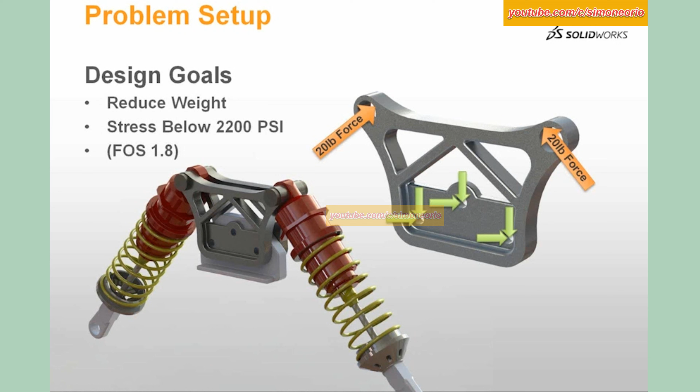What we're going to start off with is design 1, which is essentially that plate of aluminum that was just laser burned out. Design 2 has a relief cut to try to reduce weight. Design 3 has a couple of ribs put back in, and you'll see why in a second. As I went through design 1 to design 2 to design 3, I saw that the stresses were a little bit higher than I wanted, so I added those ribs to try to alleviate that, but it didn't really make a difference, and we're going to discuss why.

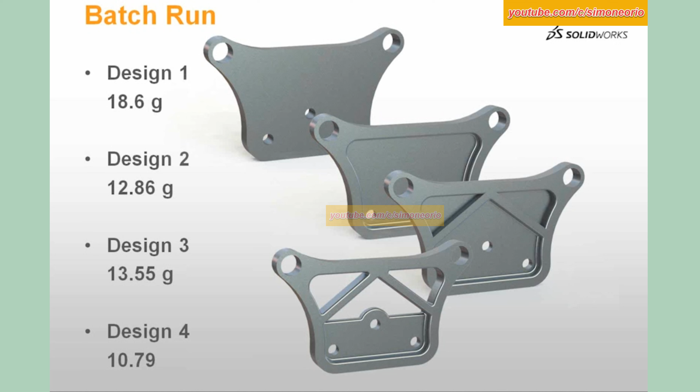We're ultimately going to end up at design 4, which gives us 10.79 grams, down from our starting weight of 18.6 grams. As you can see here, just as a spoiler, our stress is still at 2,843, so we're not meeting that original goal, but we did reduce the weight by about 41%. So we're going to discuss where we're at with design 4 and what our next step is.

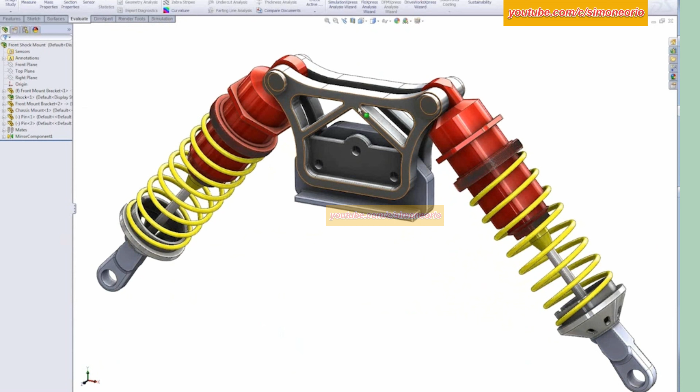Let's go ahead and go into SOLIDWORKS here, and we can see that this is our assembly model. Now what I'm going to do is isolate the work on the bracket itself, so let's open up this part. One of the things I've utilized inside SOLIDWORKS is configurations. The nice thing about configurations is they're linked to our design studies inside simulation, so essentially we can do a simulation study per configuration. If we look, this is where I started, then went to design 2, design 3, and design 4. We see the changes from that recess to having the set of ribs and then the full cuts through here.

Let's just talk about design 1 and what we want to do as far as an analysis. We can start simulation right from the simulation tab, and I'm going to start a new study, and we'll call this one test, for example. The material did come over from inside SOLIDWORKS - I have a 1060 alloy aluminum assigned to this.

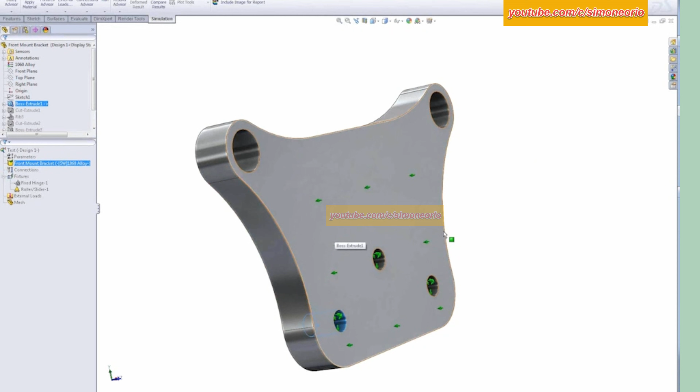For our fixtures, we have to represent the real-life fixturing of this component. These 3 holes are actually bolted into the chassis via that other component, so I'm going to fix these with a fixed hinge. The other thing I'm going to do is use what is called a roller slider on the back side of the component. Typically I would use a split line to show where the bracket actually connects in here, but for a first pass we can just assume that this whole back side cannot move in and out.

It can only slide along that plane. Our forces we can add directly into these holes essentially via the pins or the strut, and we're going to be dealing with English units, and this is 20 pounds.

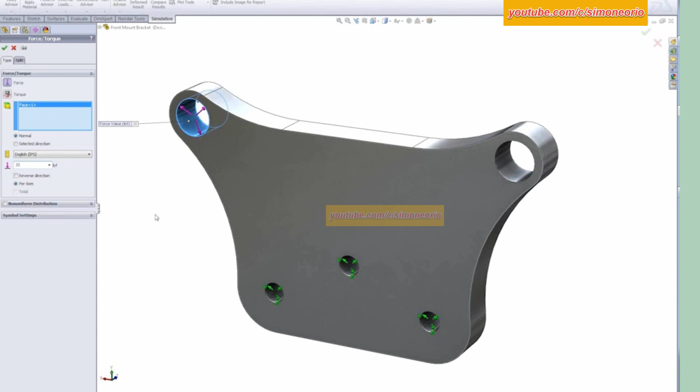Now what you're going to notice here is that the forces are always normal to the faces, but what we can do is we can specify in a selected direction. One of the neat things inside of simulation is if I have a sketch, which is what I use to mount my struts in the assembly, I can say that the force goes along that direction, and we want this to be 20 pounds.

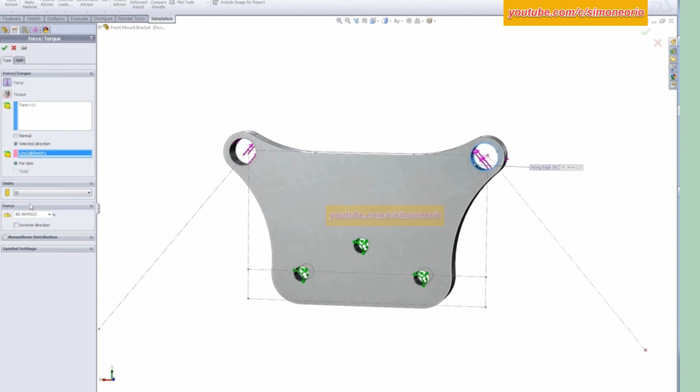So I'm going to add an additional force here, same force on the opposite side. Select a direction. I'm going to select my other sketch line to give me my proper vector, and we want this to be 20 pounds.

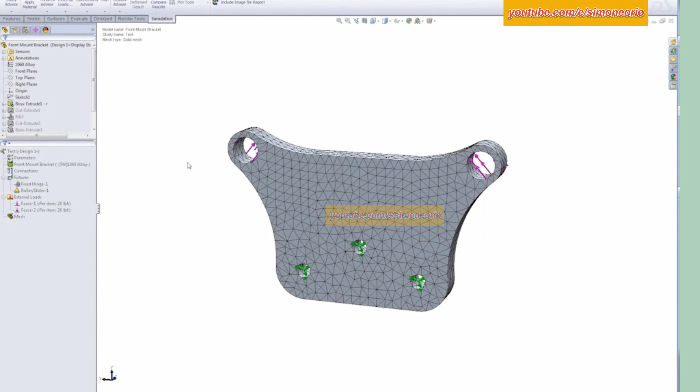So it looks like we're set up. The next step is we're going to discretize this model. So let's hide this sketch here. We're going to break this down into a series of elements in order to solve our mathematical equations across it. And then let's go ahead and run this analysis and see what we get or receive from the results.

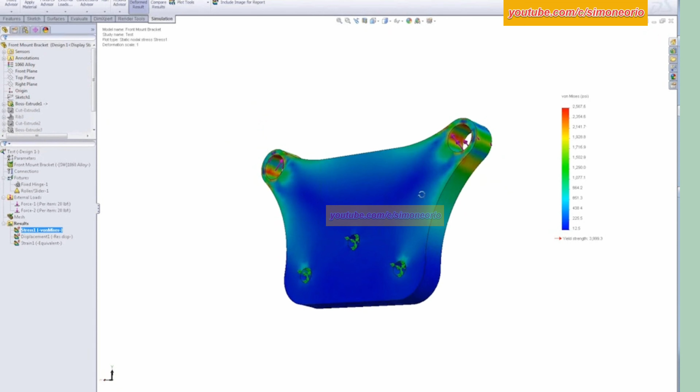So the first thing that I want to do is look at my stress results in PSI, and I also want to look at these as far as a true scale. So what we're seeing here is 2,567, so we're not at the 2200 PSI. I'm going to hide my fixtures and my loads here so we can better see this.

We can also view displacement as well, and again we can go through and look at this in inches and on a true scale. So we can see our displacement then, if we adjust this to floating, and let's increase this out, is about 0.00024 inches. So very little displacement there. We're really seeing the stress being absorbed in these areas.

Now a couple things that we can look at with this is we can evaluate the component as far as we can look at sections of it. The nice thing about this is typically with physical testing you have a strain gauge located on the part, and if you didn't put the strain gauge in the right location, you may not receive the proper stress calculations or back calculate the stress out properly.

One of the nice things with simulation is I look at the section clipping as an MRI into the part. Not only do you receive the surface data that you would gain from your strain gauges, but we can actually see inside of the part through the thickness what our stresses are and how they propagate out into the part.

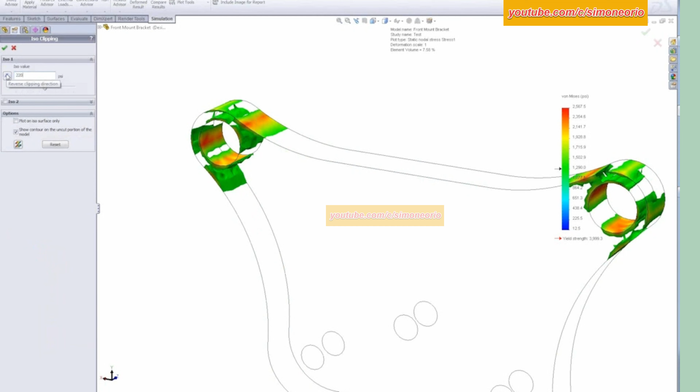Another thing that I like to look at here is our ISO clipping, and I can basically go in here and say what is everything that is 2200 and above. So we're seeing these higher areas in these locations. That's everything above our criteria.

We can also do the reverse of that if we need to, or we can say, you know what, I want to look at this at 1800 and see what that looks like. So the ISO clipping gives us a good view of what we're seeing as well.

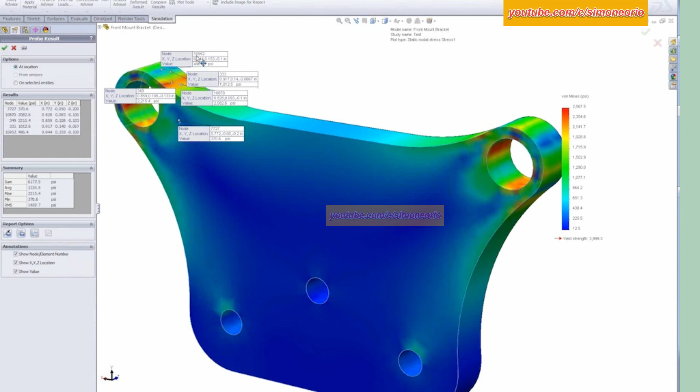We can also use what is called the probe tool, so we can go in here and probe at different areas and see what our stress is at our node location. We can plot that out so we can gain data there. We can also save that out to Excel if we need to.

Or if I want to know the average, let's say on this face, we can select that entire face and get all of our values. We have a summation, an average, a max, a min, and an RMS for everything on that face. We could also do the body as well, or an edge or a vertex.

So what we see here is we're a little bit over our criteria stress-wise, and we're heavy. So the next step might be to try to take out weight and see where we fall stress-wise. So what we can do is I can actually duplicate this analysis, and we can call this test 2.

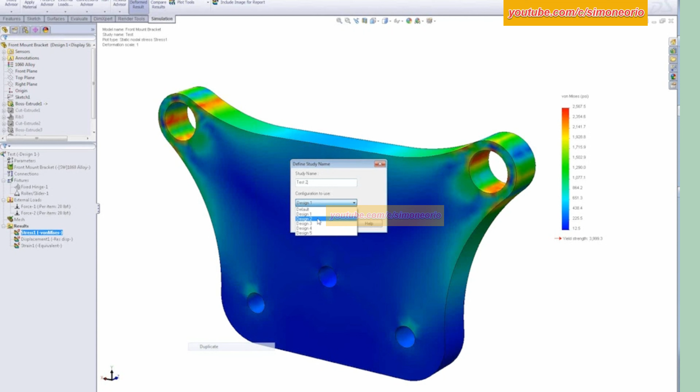And we can pick from our configurations design 2. What you're going to see is when you duplicate a study, and what makes this very nice, if I activate this configuration, our forces carried over, our fixtures carried over. All we have to do is simply mesh and rerun.

So what you're going to see here is essentially that I did that for Design 1, Design 2, Design 3, and Design 4. Now, how we're viewing this is essentially that we made these design changes without looking at our results. We made all these different versions, and now we're saying, how do they analyze or how do they come out? Well, instead of running these one at a time, I'm going to use what we call a batch run, or run all studies. What we're able to do here is go in and say, run all of these studies and tell us what are the results for each one of those.

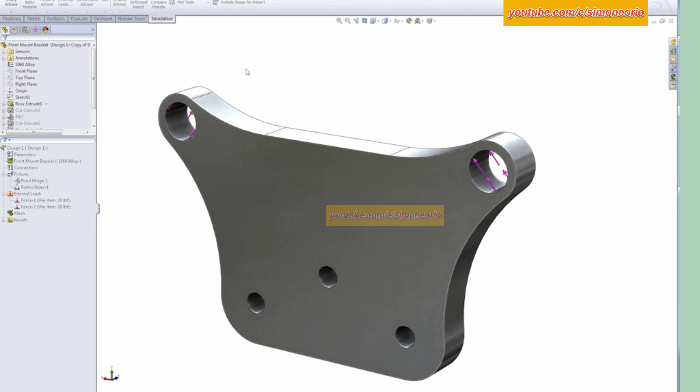So what we're seeing is it's actually meshing a part for each one of those configurations, and then it's going to go through and run the analysis for us. And what we see is we have our results.

So for Design 2, if we switch to it, we have to activate that configuration. But what we should see here then is our stress is still around 2,534, but we do have that reduced weight.

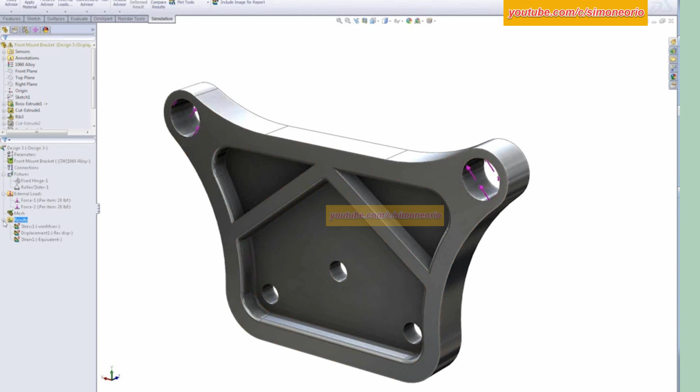If we switch to Design 3, what we want to look at here is this has the ribs in. We increased the weight here, if you recall, but having those ribs really made no change in the stress. So the stress is really being seen in these areas.

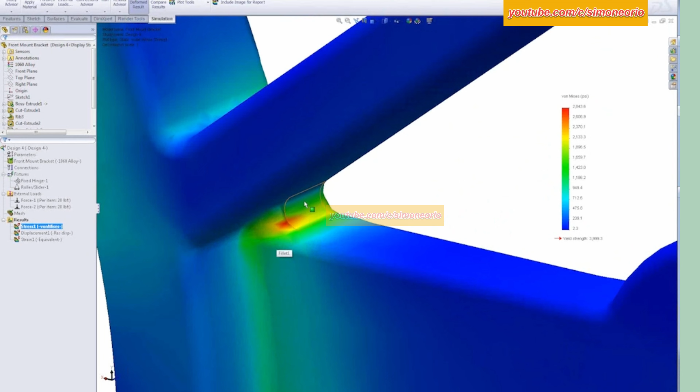And then Design 4, if we activate this configuration, what we're going to see is that our stress actually went up, and the reason being is we actually have this area with too small of a fillet, so that we're seeing essentially a stress concentration here as well.

And the reason that we can tell that is obviously because of the visibility there. And if we go into our legend, we can say show max annotation, and what we're seeing is it's calling it out in this area. So that's our maximum stress. So it's a good indicator of where the maximum stress is, or where that stress was added in if you didn't happen to see that.

So another thing that I want to look at is clearly this design is less weight, but our stress is actually higher than when we started. So, what can we do to alleviate this?

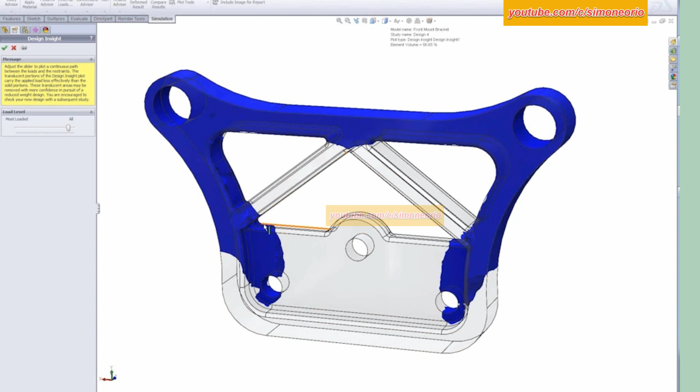Well, one of the things that I want to look at is a different type of plot, and that plot is a design insight plot. And what this allows us to see is essentially how the force is transferred from the location that is applied to the fixtures. And what we can see is it's actually through this main body and down through the bottom and into that filleted area.

So with that being said, I have one more design change that I want to take into consideration here. So I'm going to duplicate my study again, and we're going to switch to Design 5.

So with Design 5, I made a couple different changes here. Let me activate this configuration. So with the design insight plot, I saw that the bulk of the load was being applied to this upper area, so I added more mass there. I also saw that we had a stress concentration in that very small filleted area, so this allowed me to make that design change and add a larger radius in that area.

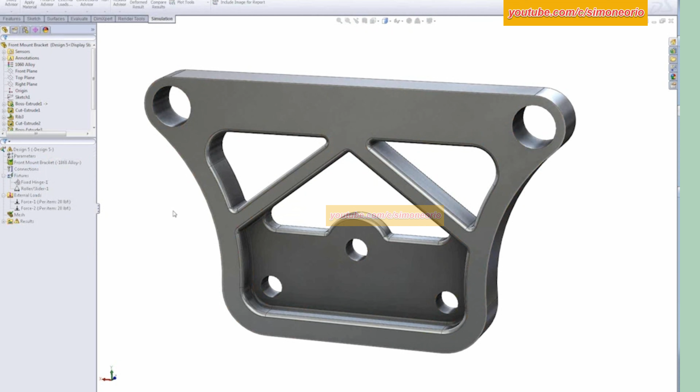So let's go ahead and run this analysis and see what we end up with. And what we're seeing here is we're now right around 2,000 psi, so we're 200 below where we wanted to be. So we're meeting those goals, and if we switch back to our PowerPoint here, what we're going to see is with Design 5, the weight is actually 13.9 grams.

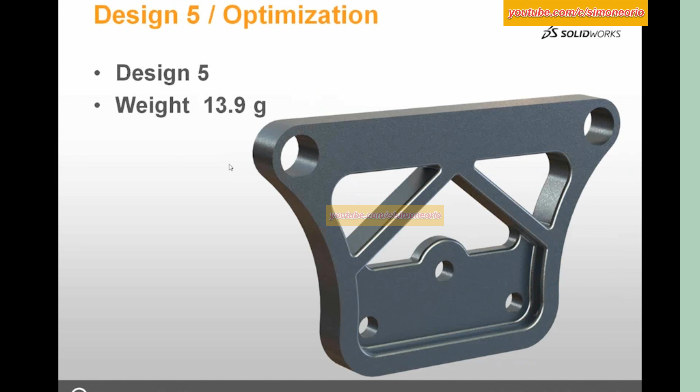So we're meeting our goals, but what can we do to really take the rest of the weight out of this? The next step is really to optimize this part. So what we can do is we can look at this and say, you know, we can vary the actual overall thickness of the bracket across here, and we can vary the size of the ribs, maybe make those larger or smaller to take out some weight.

So we could carry on through the rest of our design process, manually make those changes, add a new configuration, add a new study, run it again, or do a series of batch runs, or we can utilize what is called a design study with optimization.

So under Insert, we have a design study. Now, before we even get into that, I want to talk a little bit about sensors. Sensors are something inside of SOLIDWORKS that gives us feedback about our model. They do not have to be simulation related.

If I right-click on my sensors folder here, I can add a new sensor. So it can be mass properties, it can sense a dimension, a measurement, or simulation data. We're going to add a sensor here, but we're going to add a sensor for displacement and resultant displacement for the entire model. The other sensors that I added were stress and mass.

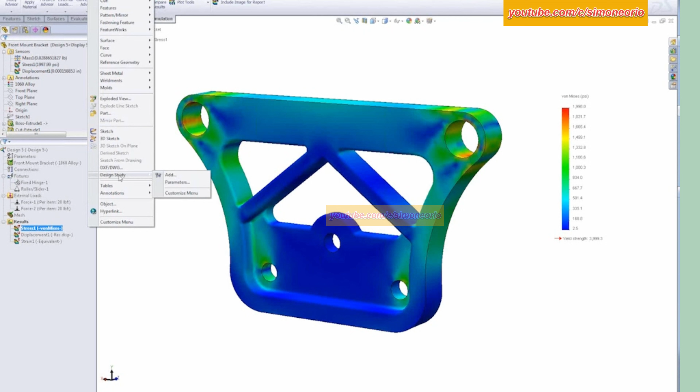We want to minimize the mass and we want to keep the stress below 2,200. Now these sensors are what give us feedback in our design study. So let's go ahead and start a new design study. First thing we have to do is tell the software what we're going to vary with this.

So I can actually pick up on my model dimensions. My thickness is going to be 0.2, and I already have that parameter added. It's as simple as going here, saying add parameter, and choosing that dimension. I'm going to specify a range for this. My minimum thickness is going to be 0.15, and the reason for this is my overall size is 0.2 thickness, so my maximum is going to be 0.2.

But my cut in is 0.125, so I want to still have some meat on this part in that area. My other parameter was the rib, so I want to do a range with the rib, and my initial thickness for the rib is 0.1. I'm going to stick with a maximum of 0.1, and my minimum is going to be 0.05.

Now the next thing we have to tell the software is what is our constraint? What do we have to stay under? So I'm going to tell it my stress needs to be less than 2200 psi, and I'm going to be calling out my Design 5 study. The reason for this is that's the latest design and that's what we want to stick with. Now my goal is actually to minimize mass.

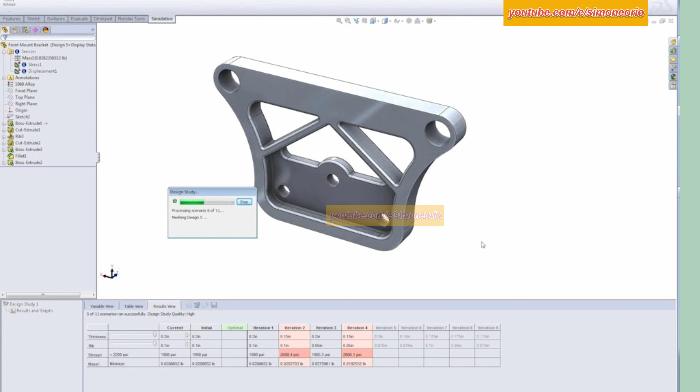So iteration 2 failed because of the overall stress. Same for iteration 4. Iteration 1, 3, and 5 are valid, so those are valid options. The beauty of the optimization is that the software does the work for you. You don't have to do any guesswork, any real amount of manipulation or multiple studies. The software comes back and says, within these parameters that you gave me, this is truly the optimal design, which is what we're actually seeing here.

So when we select on this, what we're seeing is that my thickness is 0.183 for my overall thickness, so we lowered it from 0.2, and my rib size is just a little bit over 0.05, and we're at 2,148 psi. So that's truly our optimal design. Now my initial weight, sorry to switch to pounds here, was 0.0288 pounds, our optimal size is 0.0248.

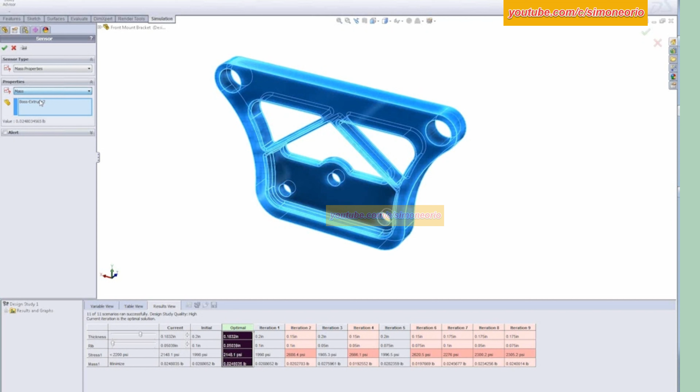If I change my sensor, so if I edit this sensor and we change the mass here, I actually have to update that. And let's do mass. Okay, I apologize, your evaluate for mass properties here needs to be in units of grams for that to update properly. So we'll go with it here. So this is our optimized design.

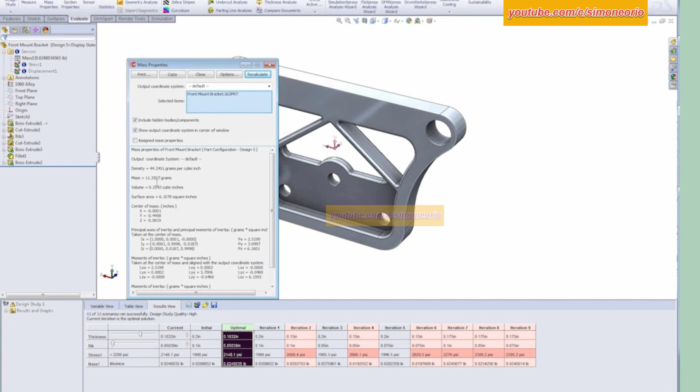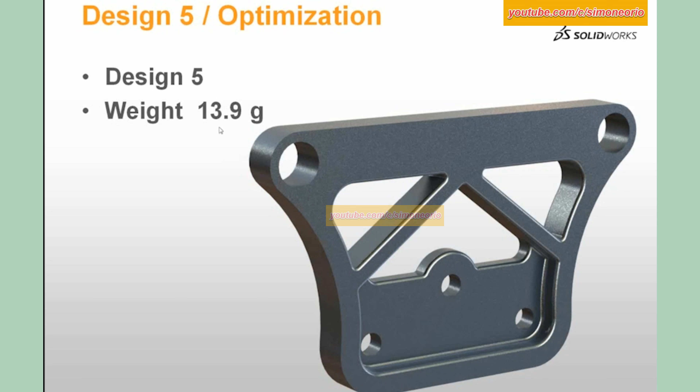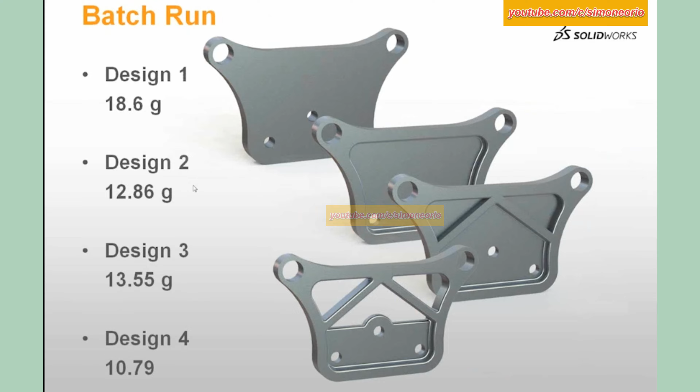If I want to, I can actually go into mass properties and say calculate, and our mass in grams is 11.25. So if we go back into our PowerPoint, we're now down from our original design. Design 1 was 18.6, we're now down to 11.25, and we utilized SOLIDWORKS simulation to get there with this optimization study.

So the nice thing about this one is utilizing Simulation Professional, we have the optimization option to allow us to go through, give the software a set of parameters. We're not limited to the number of parameters, just tell it to solve and go forward and tell us what is the true optimal design.

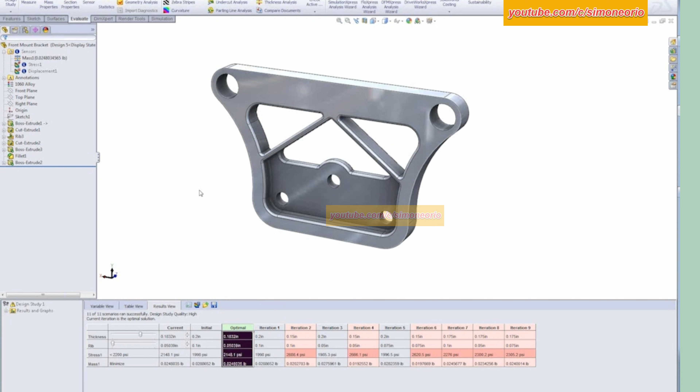The other part of this is simulation alone allows us to do multiple prototypes in the computer very quickly. The overall model for this and the changes I made took me under a half an hour, and I was able to have 5 or 6 very, very quickly. If I had paid attention to the stress in design 1 and not just done 5 different versions of the model, I would have realized that this upper area needed to be thicker right away, and we might have even gotten down to just 2 or 3 design changes and then the optimization. So all in all, the software really gives us a good feel for what we need to change to better our designs very efficiently and very cost effectively.